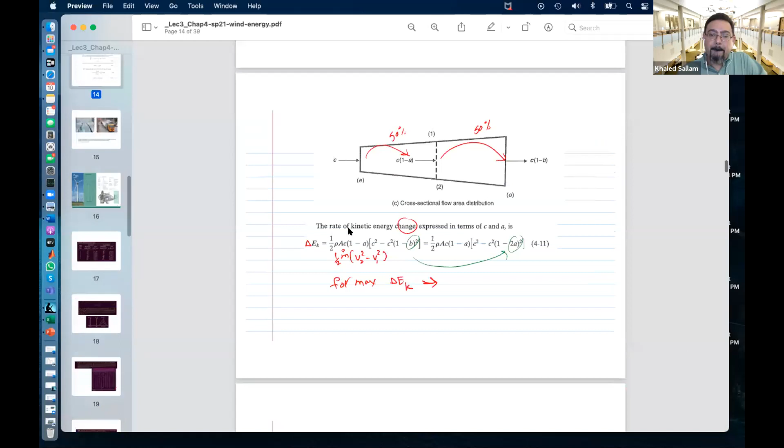We are really lucky in the States because of all the natural gas that we have and all the solar energy we have, especially in that quarter, but also because of the wind energy. We have a huge area that's basically under really favorable wind conditions. This tornado alley is also really good for wind, especially if you go high enough, like 80 meters, and that's not a big deal because those wind turbines with a 50-meter diameter is nothing. So the fact that you're gonna be hanging the axis of the turbine at 80 meters, that's typical, that's not a big deal.

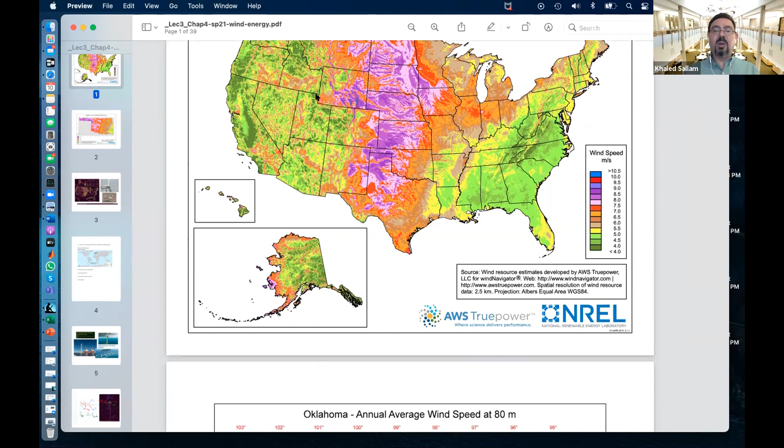So you can see all that area, and especially when you go to Oklahoma, our panhandle is a really very good place for it. And as I told you before, PSO, the Public Service Company of Oklahoma, the one that generates electricity for us, they really wanted to have a big wind farm over here and run the cable, but they didn't get the right permit to be able to do this.

But they're gonna make money by building this, and a lot of jobs too. Actually, one of the previous students that we had in the class is actually working on wind energy, but at his station in Florida now. So hopefully one of you may end up working in wind energy too.

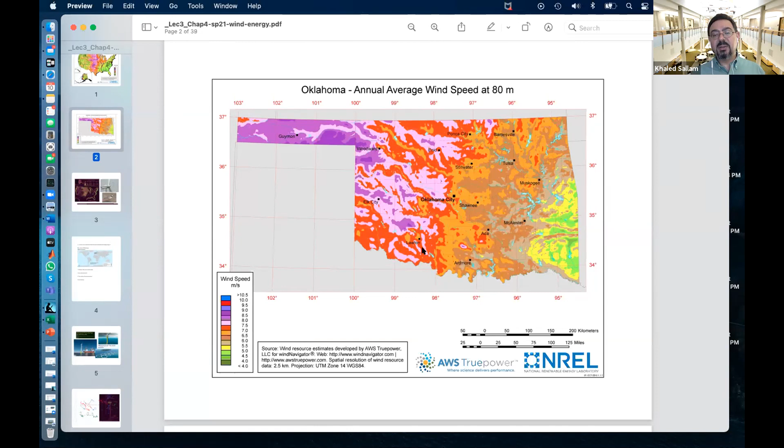But people don't like it to basically be near their beach house. And I remember, as I told you, Senator Ted Kennedy, who was supposed to be really like a green senator, like he would love renewable energy, when they wanted to put a wind farm in the back side of his own state, he refused, he declined.

So people, amazingly, and from an environmental point of view, sometimes complain about wind turbines. There is a legitimate complaint about noise, for example, if it's nearby and whoosh, whoosh, you don't want to hear this. There's also some concern about maybe electromagnetic interference. There's also real concern that this kills birds, and especially bats, and especially some endangered bat species. But there's research about how we can scare bats from getting close to them, or color it so that birds can see this thing rather than it blending with the sky. So there are ways to basically scare birds from getting closer to it.

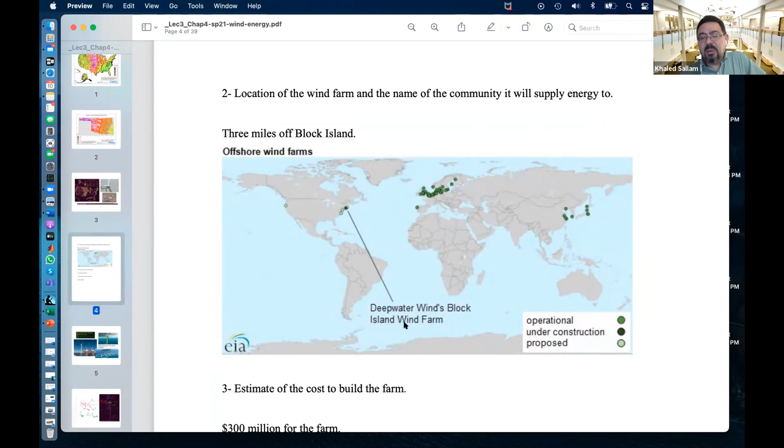Other places in the world actually have a lot of wind. These are places with offshore wind turbines, not onshore, but offshore, sitting in the water. You can see how much Europe has, while here we have only one. If you Google this, it's the Block Island farm. It just started running maybe the last 2 years or so. It's not really that old.

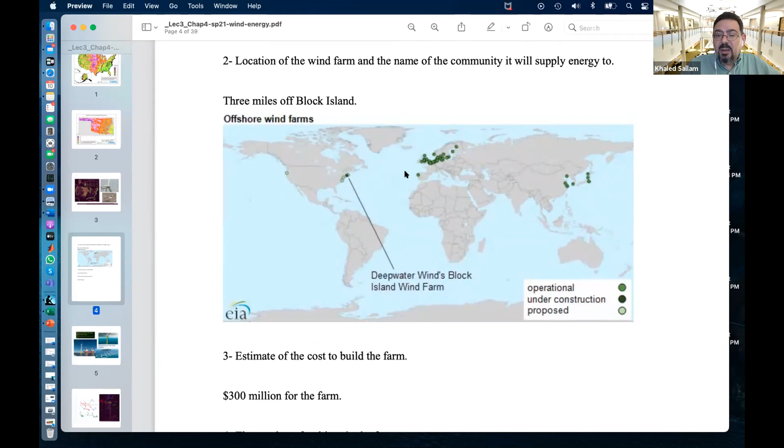While Europe has so many, you could argue that because our natural gas is so cheap, why would we invest in a big wind farm? And maybe that is true. So I guess natural gas is our blessing and our curse at the same time. But you can see how much wind farm is actually sitting in Europe over there.

So they have 5 wind farms, sorry, 5 turbines in that one. Compared to, you can see how much is in each one of those wind farms.

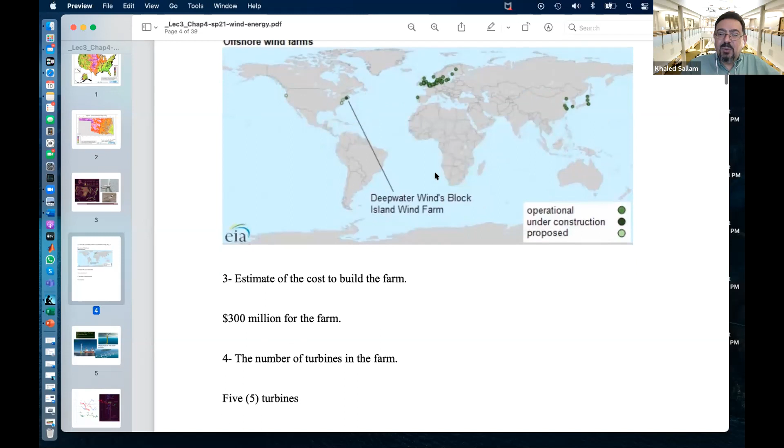Recently people even started to build floating wind farms. So what's the difference between floating and fixed? The fixed ones are sitting in the ground, so they cannot go that far deep. But if you make them floating, then you can send them very far back into the ocean, away from your beach.

So you win 2 things by doing this. One, you get away from the people that say, I don't like a wind farm on my beach, I just want to see the ocean and the waves. Well, if it's far enough, they don't have to see it or listen to it. Second, the farther you go, the more velocity you'll get because you get away from the interference of the buildings and cities on the shore.

So Japan actually built a couple a few years ago, in the place where they had the nuclear accident. In front of their Fukushima nuclear reactor that exploded, they had 4 reactors there. They built farther out a floating wind turbine. It's still experimental, but the point is you can put it there and it can generate electricity, and of course you have a cable that takes it from there to here.

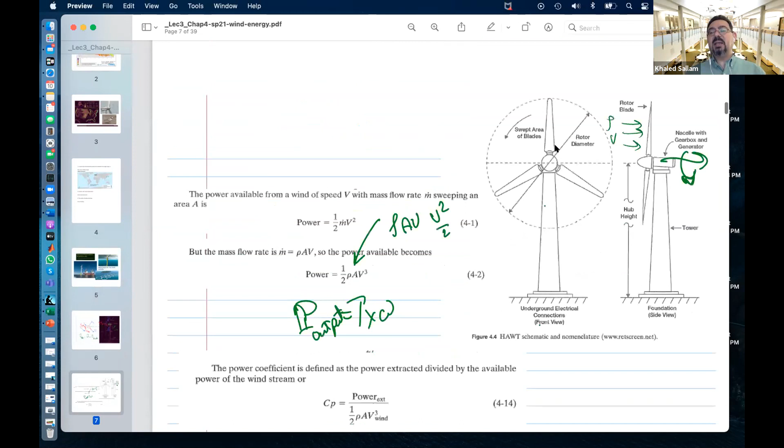But from the energy point of view, people just like to look at this and do a kind of Bernoulli equation analysis—the same thing for the wind turbine as for the hydraulic turbine. You can go into the fluid mechanics and figure out the angles, beta and alpha, but at the end of the day you can also look at the whole thing as one big black box: I give you this much potential energy, how much torque or power am I getting, and that ratio is the efficiency. We saw those graphs that plot efficiency as a function of specific speed, remember? The efficiency was as high as 99, 97 for a Pelton wheel, and in the upper 80s for Francis and Kaplan.

So the same thing applies here for the wind turbine—we can also analyze this from the energy point of view. What do I deliver to this turbine? I give it kinetic energy in that big cylinder. This air is coming, I have an area pi r squared, and rho times the area times the velocity—that is my flow rate, M dot. Rho A V is my M dot.

And the kinetic energy per unit mass is V squared over 2, so this is the power. The power delivered to that disk is half rho A V cubed, because V squared comes from here and V from here—so the power is a function of V cubed. That's why they show you those maps all the time: when you go from 9 to 10 meters per second, it's a big deal, because the power scales with velocity cubed—9 cubed versus 10 cubed. Going 1 meter per second extra is a big deal.

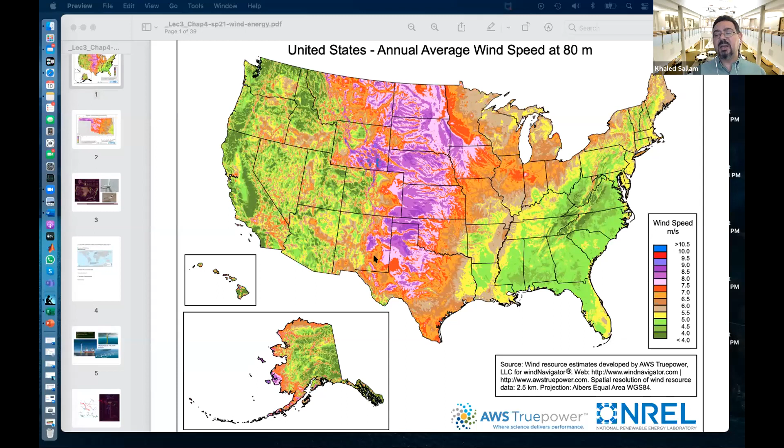So now, how much of this input power is going to be electricity on the other side of the cable? The ratio between those things is our efficiency. But in wind turbines, they don't call it efficiency—it is efficiency, but they call it CP instead. What's CP? Power coefficient, which is power output over power input, which is efficiency, but we're not going to call it that—I think we have to respect their vocabulary.

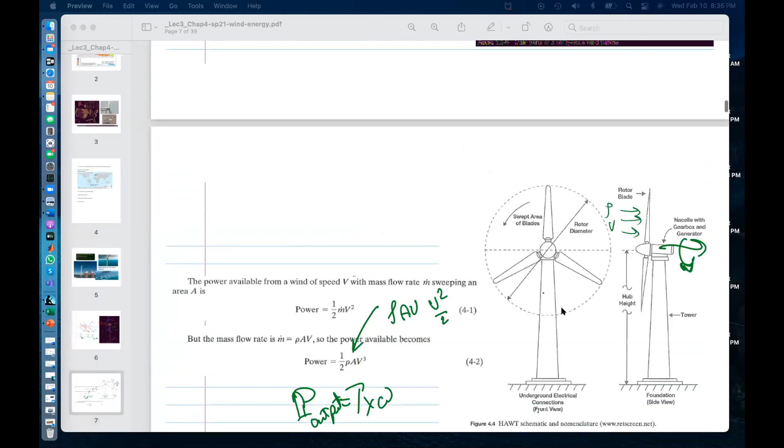So the power coefficient. Sorry to interrupt—no, interrupt anytime you want. Would you mind showing me that velocity on this figure that is right now in this slide? This one? No, no, no. This one? Yeah, right here—that velocity, the wind, and all those in this figure, this explanation on that figure.

What do you want me to show you? I'm still confused on this V wind and U blade and all those. So there are two velocities here for the air.

There is the absolute velocity and there is the relative velocity, right? The absolute velocity is the velocity that someone on the floor, someone not moving, will see. That is this one. Makes sense?

It's all axial and it's coming toward us. So we are talking about the blade of the wind, right? I mean, like that windmill. There's no such thing as the blade of the wind, there's a blade of a turbine.

This is a blade of the turbine, and I am doing a cross section of it. This guy really goes from the hub all the way to the tip, as you can see over here. See, it goes all the way from the hub to the tip. So if you just cut in that place, it looks like this, except we are cutting this guy, the horizontal one, in front of our eye.

Right? And so the wind is coming toward him, coming parallel to the floor, right? This is the ground. And so the wind has to come horizontal, totally horizontal, toward us.

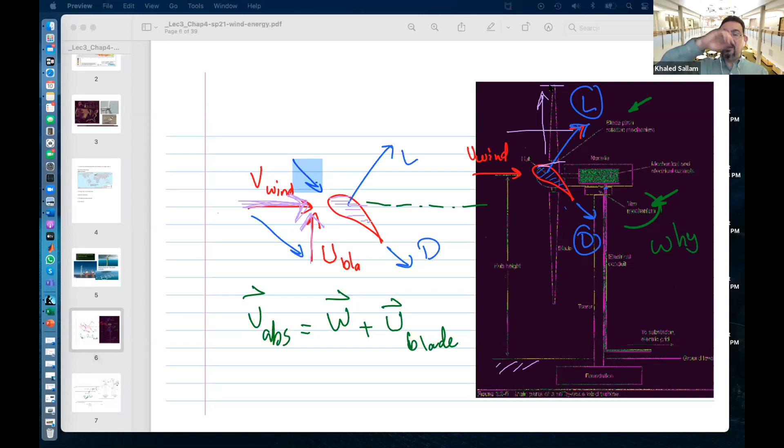When he's at the top point, where is its velocity? Anyone? What is the plate velocity at this place? There is no velocity, I guess. No, there is velocity. Help me, anyone. What is the velocity of the plate when he's here, at the highest point?

At the tip of the blade? I want the velocity of the tip of the plate, which way it's going. That's what I'm asking about, the tip of the plate. What's the velocity right now, which direction is it moving, when he's at the tip? When the tip is at the top, not dead center, the top place. When he's at the top position, counterclockwise, that is the velocity of the plate.

Counterclockwise, away from us, right? Yes, I wouldn't exactly call it that, but counterclockwise, correct, and away from us, normal to the page, right? Yes, you will be shooting exactly normal to us.

And when he comes down on this side, on the other side, he will be shooting down. So on the other side, if we want to plot it, he would be like this. That would be his U. And he will look like... he will not look like that, he will look like this. Make sense?

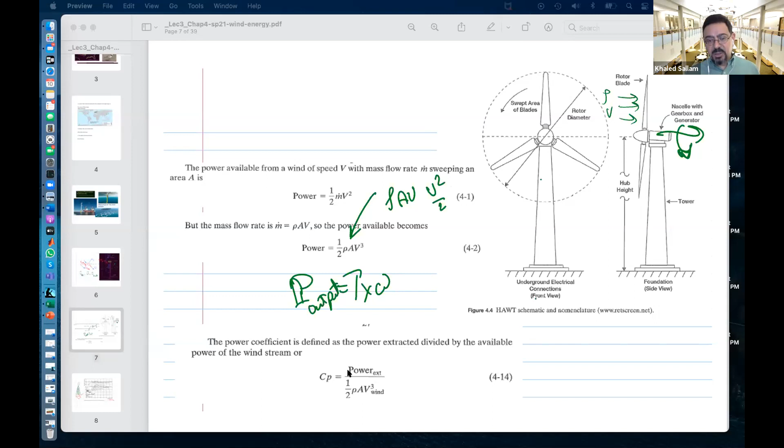So we said it's nice to see the plate angle and all those things for optimizing the direction and everything, but also it's important to look at the whole thing from an energy point of view. So from energy point of view, one should basically look at the output and the input, and the ratio between them is the CP, right? Power coefficient, which is efficiency.

So how does the CP look like? Here, this is the CP on the y-axis, and for different shapes, the CP is a function of the tip speed ratio. What's the tip speed ratio? Omega r divided by u wind. What's omega r? This is omega times r, so it's like the tip velocity. And u infinity, that's the wind pushing on it.

So first thing you notice, two really amazing things on this curve. What is amazing that you notice? Two things that will make you go 'what, I cannot believe that.' What don't you believe on this curve? The one blade rotor - that got me by surprise.

Well yeah, but it's not really practical, right? You can see that the maximum thing you get is like with 3 blades, and that's why they are most common. 2 blades are not really that great because there is kind of an imbalance when the plate is behind the tower - what happens is it's in a really bad spot, not getting power. Only when it's cleared the tower can it generate power, but here it's dead.

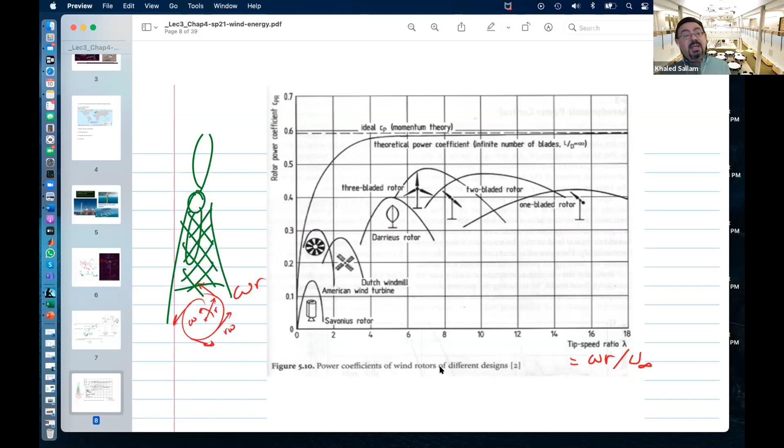What's the explanation? It is running faster, right? The explanation is that those blades are not running by drag. If they were like a Viking ship where the sail is pushed by the wind, that sail cannot move faster than the wind, no matter what. But when you generate force based on lift, not drag, you can make the speed of the blade faster than the wind blowing on it.

Like a sailboat - if you look at sailboats, they can easily run faster, twice the speed of the wind blowing on them. It's really interesting to plot the wind and the sail of a boat - I used to do this for experimental fluids, not something I'll give you in the exam. The boat would look something like this, and the sail would be something like this, with the wind coming this way and the boat moving in that direction - v relative would be the lift, which pushes us forward.

And yes, there is a drag direction that will try to send us sideways, but it will be countered by the keel. That's another problem to fix. But the point is, now let's make the boat go faster than the wind.

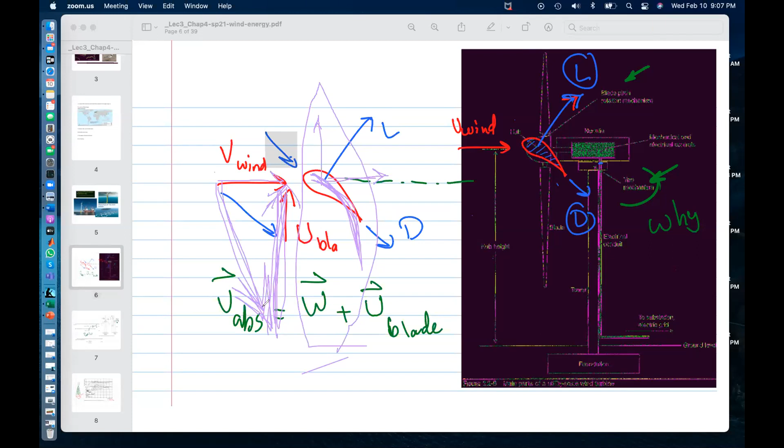So no matter how fast, that's the key point here. No matter if the boat is moving 10 times faster than the wind, there is always V relative, right? And all you have to do is adjust the sail for that new direction, and it will still generate a force. Yes, the force now is more and more pushing you to the side, but still there is a contribution that pushes you forward. So because we depend on the lift, we get a component that takes us forward.

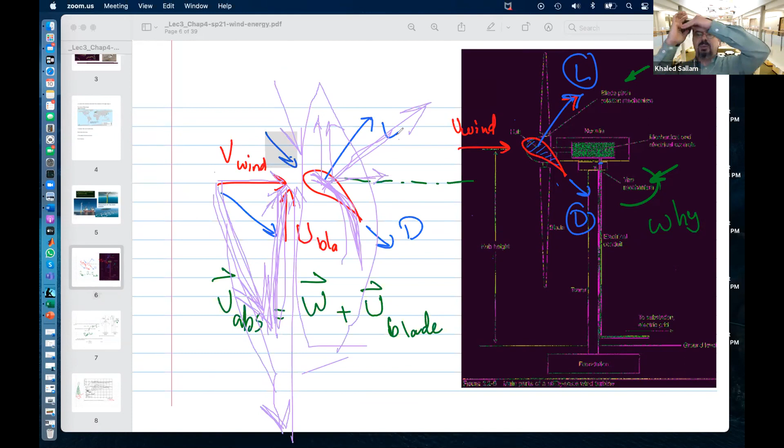Okay, have we depended only on drag, like a sailboat in the Viking time, where they just have that square sail and the wind is blowing from behind? It cannot move any faster than the wind speed. So what I'm saying is that no matter how quickly this plate is moving, there is no escaping the wind. There is always going to be V relative.

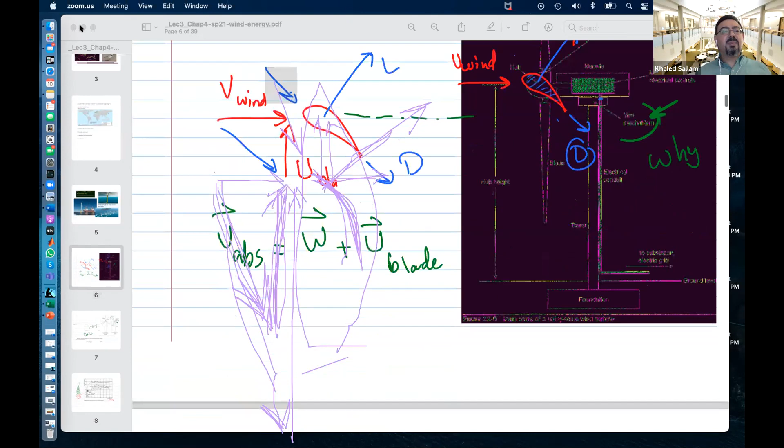And so that's why... let me stop sharing and share again, that will clean things up. So no matter how quickly your plate is moving, 7 times, 10 times, you will still get a contribution. But the guys that run with drag, like this Savonius type, that is mainly drag type, cannot hit more than wind speed of 1, after which... and that's the tip, the rest of the plate is moving with smaller speed. That's why it still generates some power. But at one point, when all the plate is running as fast as the wind, you get 0 power.

Does this make sense? So you depend on the drag, and those guys are like cups, the Viking ship sails. You cannot move faster than the wind. But if you depend on the lift, like the Dutch turbines, the traditional ones or the American wind farm turbines, you'll be able to hit 2, 2.5 times wind speed and stuff. It will still work.

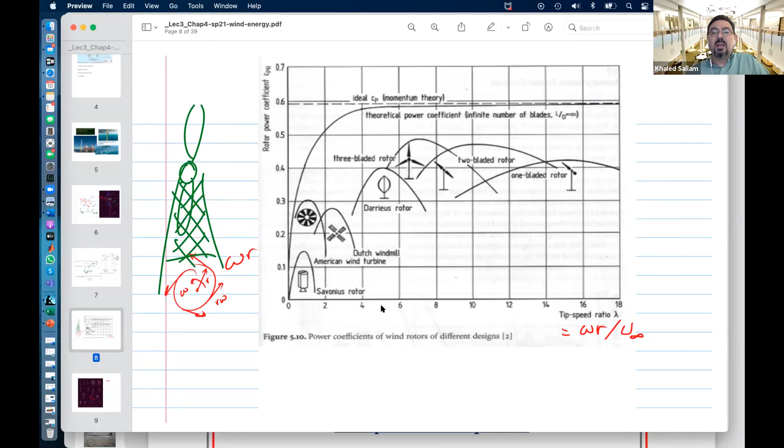Very good. So then from this curve, what I need from you is to be able to extract this point, the CP based on the speed. So if the problem says the wind turbine is running with a tip speed ratio of 7 and it has this much dimension, find out what's the maximum power it can extract. You would say, well, it has this area and the wind speed at that place is 7 meters per second, for example, or whatever the wind speed is, and rho air is 1.2. Here is the input power.

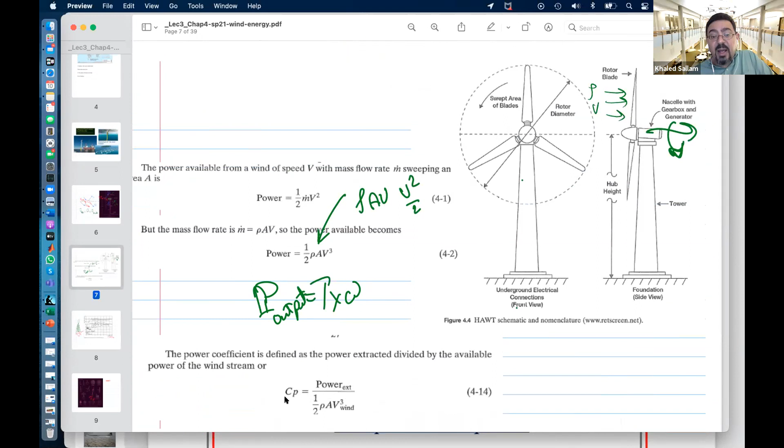Now to come up with the output power, I need my CP. So I go to this curve. What turbine did he say? Did he say American wind farm or Dutch or the 3-blade turbine? Whatever he said, I'll go there, find out the tip speed ratio, right? And I calculate my CP. Does this make sense?

So now what controls U infinity? That is Mother Nature. Mother Nature will tell you U infinity in that place is this much. But what controls omega? What controls omega?

That's the lift, right? Say that again. Say the lift, or the lift force. Well, you can manipulate it by playing with the plate angle. That is correct, and you can see there's a way to make this turbine rotate less, or make it not rotate as fast, by messing up its angle. Like you can control this pitch angle so that it's not optimized and therefore it will not run as fast. And you do this when the wind speed goes really high. When U infinity is very high and you don't want it to speed up, you basically mess it up so that it's not generating as much lift. But that's control over it.

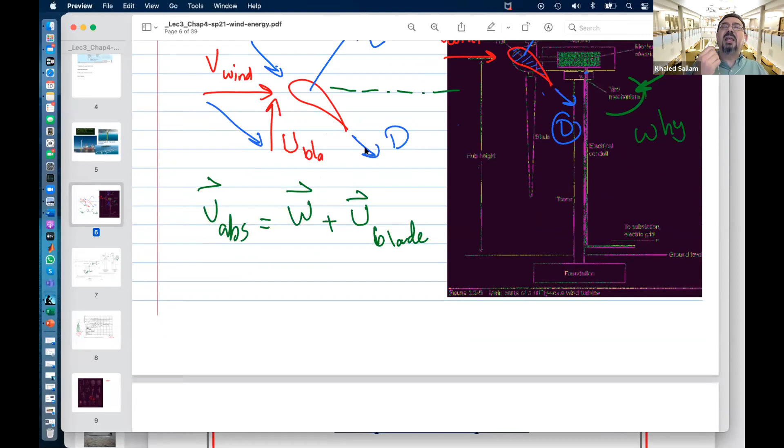But what is the main driving force that controls omega? What do you think? Like why would the plate run at 100 RPM or only 10 RPM for the same wind speed? Radius?

No, I don't think it's the radius. The surface area? No. The angle at which it hits? No, I think that's what Denver just said. No, it's not the angle.

It is the load, the generator, the pump, whatever is holding the shaft on the other side. The wind is twisting the plate, and someone else on the other side is holding the shaft, like, don't move unless you move me first. That shaft is connected to a generator, or to a stone crunching grain in the old Dutch mill, or to a pump taking water from a well. So the load and the gearbox connecting the two will make the shaft easy or hard to turn, right? And it is the job of the designer to make sure that the load, with the power available from the turbine, puts you in that place.

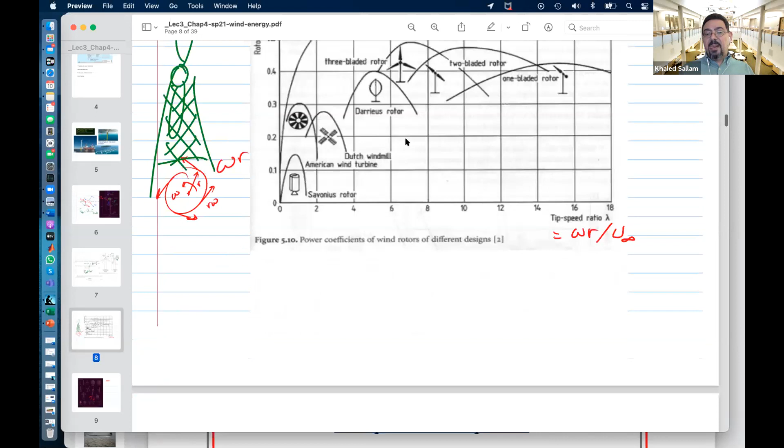So there's a general classification: horizontal axis wind turbines, where the axis of rotation is horizontal. Those are the traditional ones, and the modern ones that everyone uses are kind of different. People try to do a lot of modification in order to make the area bigger, whether at the inlet or at the exit, that helps.

And look at this one. Why do you think they have 2 plates, 2 rotors, counter-rotating? The one behind would catch the wind from the one in front, especially since the front one is already sending the flow with a twist. So the other one can rotate the other way. So when the wind comes in, the first one spins this way, and the flow behind it goes the other way. That twist in the other direction is perfect for the other rotor to spin the other way and use it.

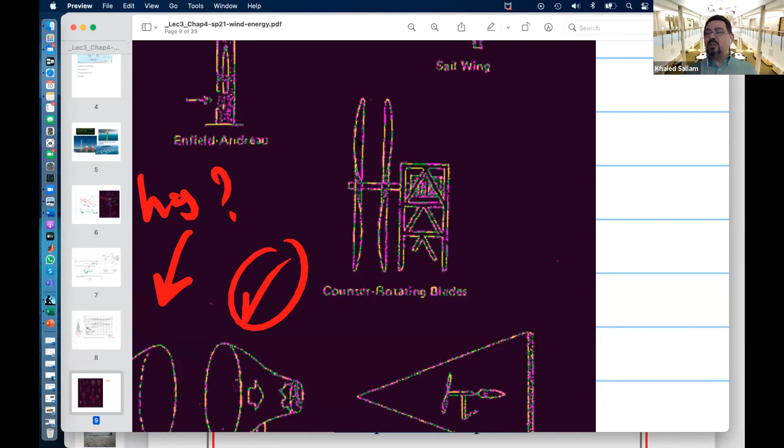And then there are vertical axis wind turbines, which are not as common, although there's actually something nice about them. What's nice about the vertical axis wind turbine?

Vertical axis, because the shaft is vertical, right? So what's nice about them? Can anyone say something nice about them, when the shaft is vertical? It doesn't matter which way the wind is blowing. Exactly, they don't need a tail to direct them. You just set them in the wind and they will run.

They don't need redirection. But here's one more nice thing: their generator, which is usually very heavy, can sit on the floor. So you don't need to hang the generator on top of the tower, and the tower doesn't need to be as big and heavy, since the generator can sit on the floor. That's why people think those are more suitable for urban settings, like on top of buildings.

I found something else just like two weeks ago, from February 5th, Department of Energy. Look at this, it's exactly like this one. So it's a helical turbine, but vertical axis. And rather than standing up in the wind, it's sitting in the water. So this will go down.

What's nice is the guy who invented it had a patent on that design. Amazingly, whether the wind or the water is coming this way or that way, it always rotates in the same direction. So isn't that nice?

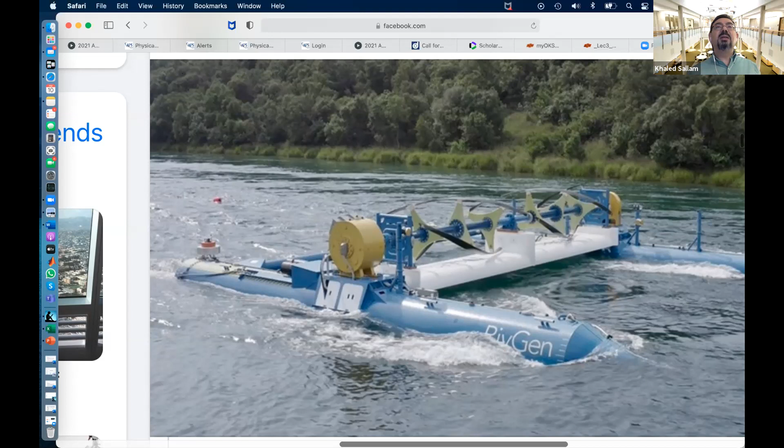One year, the velocity diagram of that was actually the homework. Why don't you plot the velocity diagram when that plate is here and here and here as it rotates in the wind? No matter which way the wind is coming, from the right, left, top, or bottom, you always rotate in the direction of the leading edge. So the airfoils will each rotate forward.

So what I'm saying is, if we imagine a circle like this, and the airfoil is here, and here, like this, and here, like this, and here, like this.

And the wind is blowing this way, it will always rotate this way. Whether the wind is coming this way, or from the top or right, it will always rotate in that direction. How do we do the velocity diagram for something like this? This sounds like a good homework.

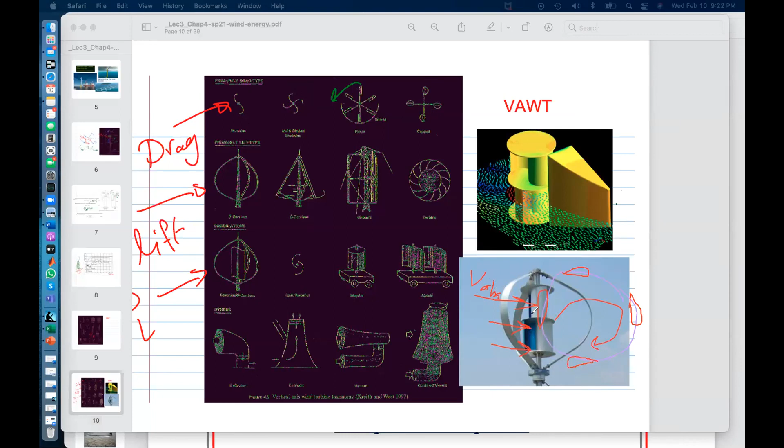So let's look at this guy. Where is the U going? Up or down? Up. So here is U, and if this is V and this is U, which way would W be? Should W go down like this or up? Down. So this way, W plus U equals V.

And if W is this way, which is the direction of the drag? Drag should be in that direction. That's easy, that's the drag. But now the lift, is it up or down? Up. Excellent, this is actually not easy, people get confused. So it will be up.

Again, look at the lift. It's helping because it has a component, L theta, that is in the direction of rotation. It has a radial component that doesn't help, but it has a component that's pushing. And the drag is the opposite, it has a component that will eat from our L theta. So you're hoping that airfoil is such that the lift is really way bigger than the drag.

And now when the wind is coming this way, on the back side, because the wind keeps going everywhere, let me draw the wind, my wind is red. The wind is blowing this way. So which way is the plate, up or down? Down, like this. That's the plate. And so which way is W, going up or down? It's going up. Excellent. So this way, W plus U equals V.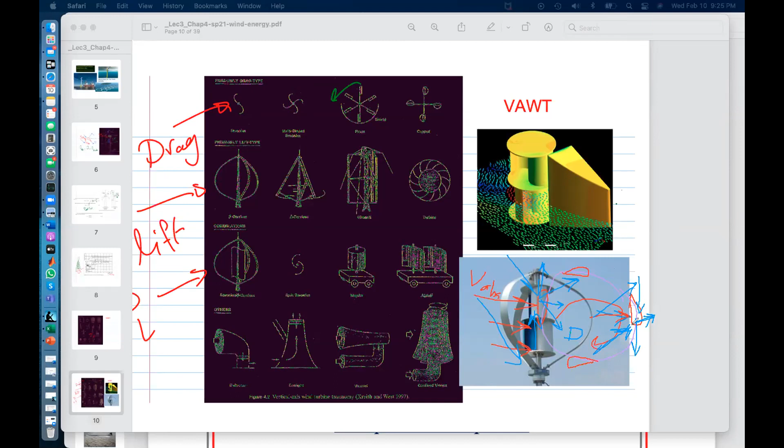So the drag is in the wind direction, the V relative. Again, we don't care about V absolute. This is the drag, and the lift, should it go up or down? Go down, right, should go like this.

So now how do we tell? Basically for the airfoil, in order to find out the aerodynamic force, it's much easier to guess where the total aerodynamic force is. Is the aerodynamic force going to be like this or like this?

Actually, if this was the lift, then the aerodynamic force would be like this. The total is the lift plus the drag. So you need to ask yourself: if I am pushing this way, will he get pushed this way or will he get pushed that way?

He will help, right? But here it will be all drag, and that's not very useful. Here, when the wind is going this way, this will be all drag. There is no lift, and that doesn't really help. So there was this region where he's not really helping.

But in general, he was always getting a force that will turn him this way. And amazingly, whether the wind is coming this way, from the right, from the top, or the bottom, you will always see that he will always turn clockwise. And that's the deal with this guy too.

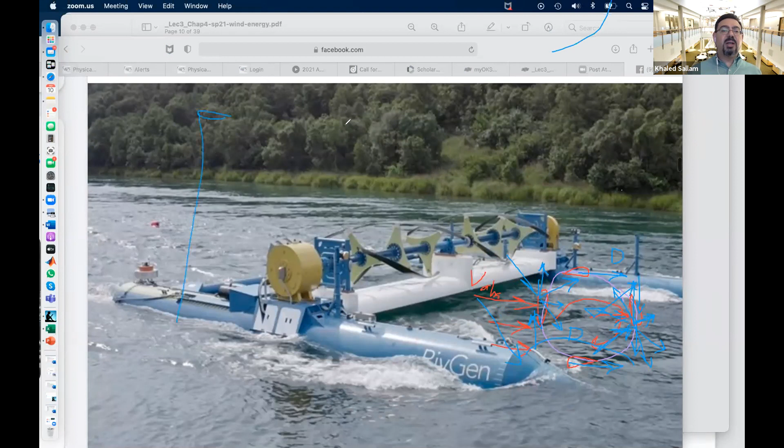So each one of those airfoils - why are they helical? Why are they set in a helical direction instead of straight? The straight version is called an H-rotor, where all the airfoils are basically sitting straight, attached vertically on the circle. But when they make it with a twist like that, why do you think that is the case? It has to do with that velocity triangle that we just drew.

Because there are places in the cycle where the airfoil is not helping - he's actually being slowed down because he's flying against the wind. So when he's flying against the wind, he is a liability, he's hurting us. So when you have them straight like this, you have a whole plate that is really hurting the cycle, and the turbine will be like tuck, tuck, tuck - every time one of the plates comes to that place, it will be a problem. But when you make it helical like this, what's the advantage?

Anyone? Well, in that particular spot, I guess it would be thinner or twisted a certain way so it's not creating so much resistance. When it's helical, there is always one spot in the good place and maybe one in the bad place, but it's continuous operation - you're always having the other plate in a good place and the other one maybe not as good, but there is no tuck, tuck, tuck, tuck.

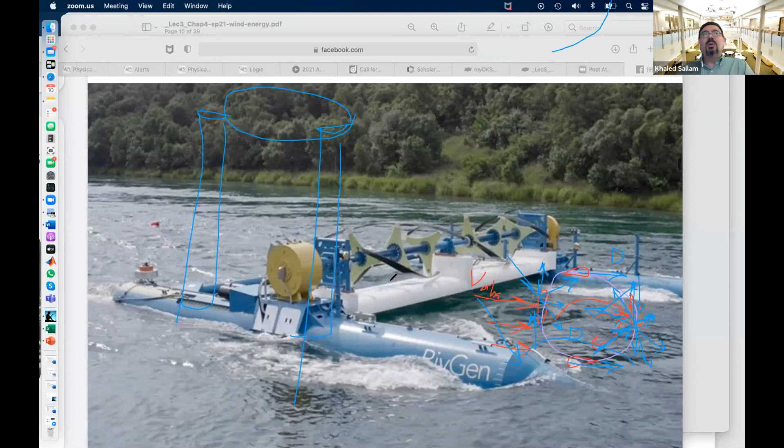It's always smooth. It's like if your family has 3 kids, and one of them sometimes gets in trouble - every time he gets in trouble, the whole family goes down. But if, instead, he's always in bad shape while the other two are always in good shape, then the family goes smooth, there is smooth operation kind of. So with a helix like this, there is always one section in the bad position, but the rest of the airfoil is really in good shape, and so they wouldn't suffer as much.

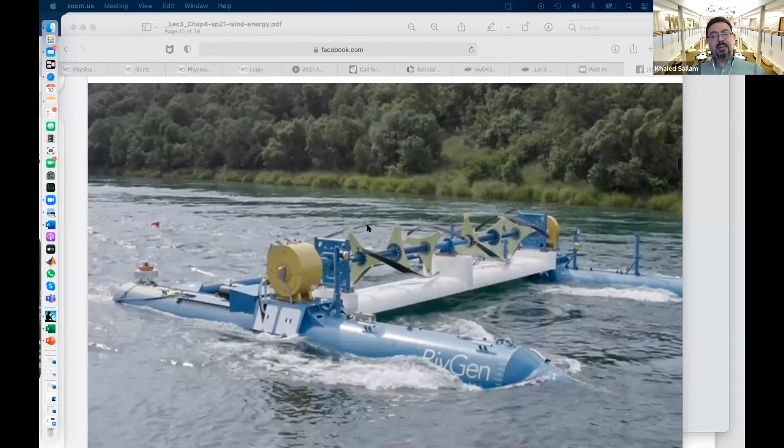So anyway, they are installing this for a place, 35 kilowatts. You can see it's not really a big deal, but for a tiny Alaskan village, rather than driving natural gas to them or giving them gas for their diesel or gas generator, something like this, no matter how expensive it is, actually makes absolute sense to run. Does this make sense?

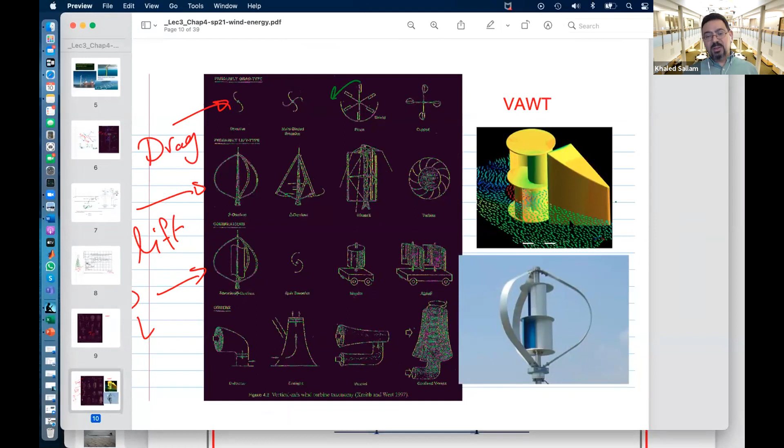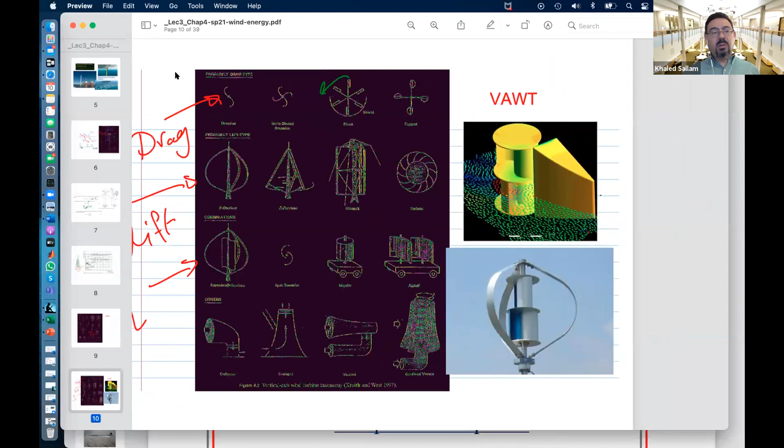This guy, by the way, Ted, is working for solar voltaic now. He actually took the course a few years ago, and now he works for Francis Solar, which is part of Tesla in Tulsa. Their job right now is to build as many charging stations for electric cars as possible on the highways. It's funny, when he got the job he told me his only exposure to solar energy was in that course. So maybe one of you will get a job in renewable energy, and this course would be the only thing that you would benefit from. Hopefully the course would be useful for at least one of you.

All right, so now, all those turbines, horizontal or vertical - what is the theoretical limit? Why did Betz say it's 59%? He derives it over these next two pages, just from an energy conservation point of view. So this is the Bernoulli equation between the inlet over here, and going to this.

P1 is just before he goes through the plate, and P2 is just after he goes past the plate. That's why in the sketch in the book, P1 should be here and P2 should be here. So he's basically building pressure just before the turbine, and as he goes through the turbine, his pressure drops, just like what you'd expect going through a compressor. Before the compressor your pressure is low and you jump up; the turbine is the opposite.

But while the pressure drops during going through the turbine, the velocity on the other side is kind of continuous, because of the flow rate. And so he's saying that once you leave the turbine far enough, the pressure will recover again and you get the regular pressure back.

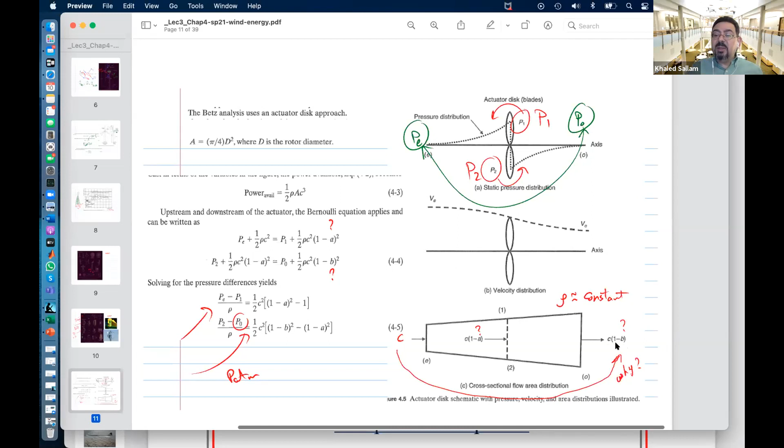And then he realizes that at the end he's going to slow down the velocity. Otherwise how would he generate power? The way to generate power is to slow the kinetic energy, eating into it to make mechanical power. So he's going to slow it to C multiplied by 1 minus B. What is that B? Is it 50%, is it 30%? B is a fraction. We'll see what is the maximum, or what's the optimum B.

And you may think that, of course, I should make B go to 1, meaning the exit velocity should be 0. That is the maximum power, right? From an energy point of view, if you want something to be 100% efficient in harvesting, you should eat all of it, right?

Like a consumer who comes into your shop and you want to harvest all his money, so he leaves with 0 money — then your efficiency of earning is 100%. So the wind comes to us and should leave with 0 velocity. But the problem is, if the consumer leaves with 0 money, he won't be able to get an Uber to go away. So he will stand at our door, not leaving. That's not how this works.

So it's almost the same idea. If you kill all the wind speed at the exit, the wind is not going to leave. You still need velocity to let it leave. And that point is what, as you'll see in the derivation, the fact that we need velocity to still leave is what will turn our

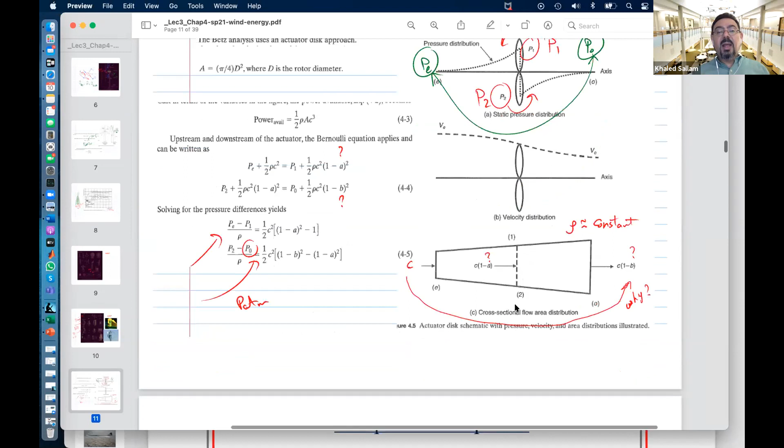He applied the Bernoulli equation between here and here because there is no external force, and he's applying the Bernoulli and momentum equation between here and here, again because there is no external force between the two. Then, just a bunch of mass, and at the end the force on the turbine is P1 minus P2 times the area. From that he's saying that force is the force the turbine experiences.

Where is it coming from? It's coming from the wind, right? I mean, who else is pushing the turbine plate? The wind. So when you apply the momentum equation between the force and the momentum at the inlet, m dot C, and the outlet, m dot C times 1 minus B, which we don't really know B. We don't actually know two things, by the way.

We don't know B. We are trying to find out what's the optimum B. And again, it's not 1 — we don't want to slow it down to 0. Otherwise the wind will not leave. But we don't know what's the optimum. And we also don't know A.

What is A? The wind starts with C, slows down to C times 1 minus A, and then slows down to C times 1 minus B. So first, he's trying to figure out what's the relation between B and A. Then he'll try to optimize B or optimize A — one of them should be the variable. Once you find that optimum value, you'll be able to find the corresponding optimum power extraction.

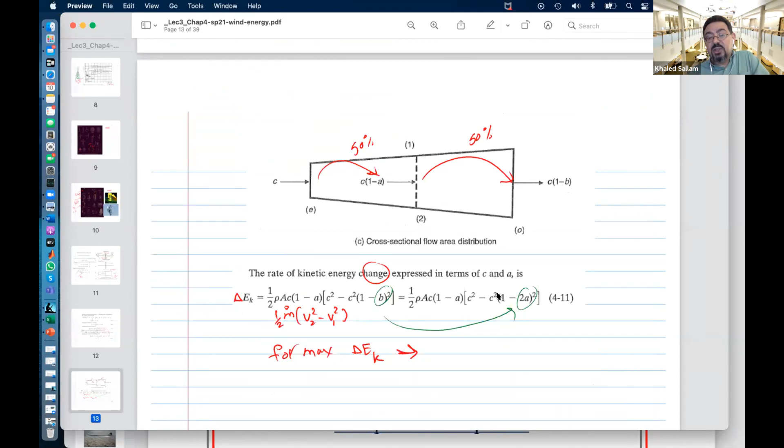So he's finding out what is the energy lost between C and C times 1 minus B. He found that the energy lost is the energy he's going to extract. Then he differentiates that extracted energy expression with respect to the variable that controls it, which is A. So dE/dA equals 0, and from that he figures A is 1/3. So the wind slows by 1/3 optimally before the turbine, and 2/3 before it leaves — and this is the maximum power you can extract.

What's the relation between power and energy? What's the unit of energy? Joule. And power is joule per second. So power is the rate of extracting energy, right?

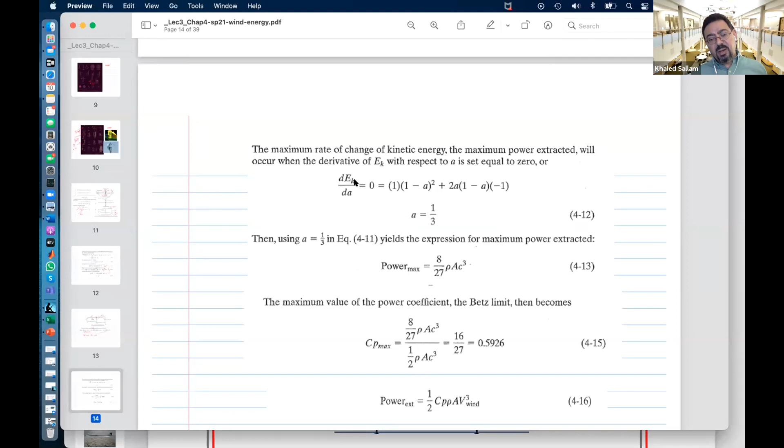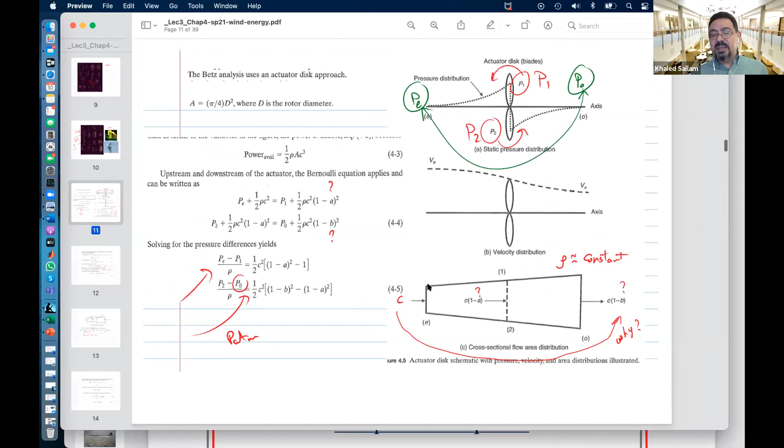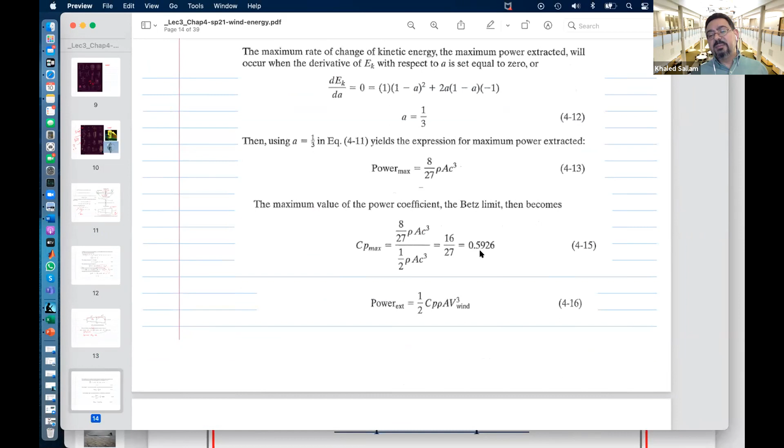That is the Cp max — the Cp max that Betz came up with. This 0.59 is basically just based on the fact that I cannot let the wind die at the exit, otherwise it will not leave.

So the power is m dot times delta of half V square — the change in half V square. But the m dot that's going through is also affected by the velocity through the plate, and that velocity turned out to be related to the velocity at the exit. So if you kill that exit velocity, you also kill the flow rate going through, and you get zero power.

Does this make sense? So what should really be amazing and puzzling for you right now is why this makes sense — we get it, but why did we manage to let the water leave with zero velocity at the exit for the water turbines? Why was that possible?

Maybe a hint: that helical turbine we just saw for water — if it were a wind turbine, it would also have 59% efficiency and could not go to zero, so it could not reach 100% like the Pelton wheel. So why is this one treated as if it's a wind turbine? What is the difference between those two scenarios?

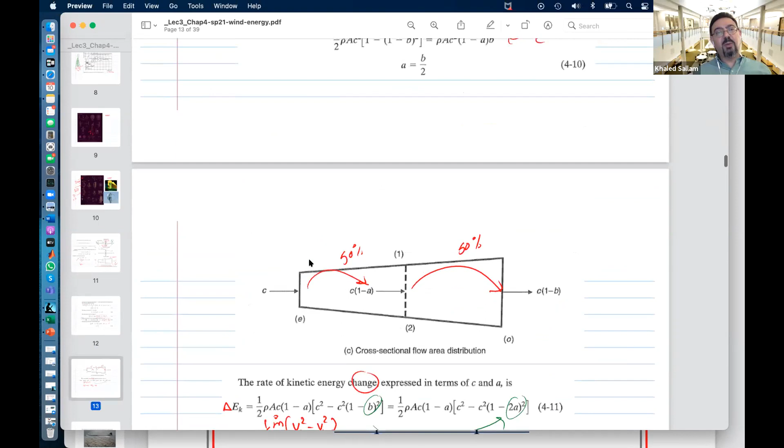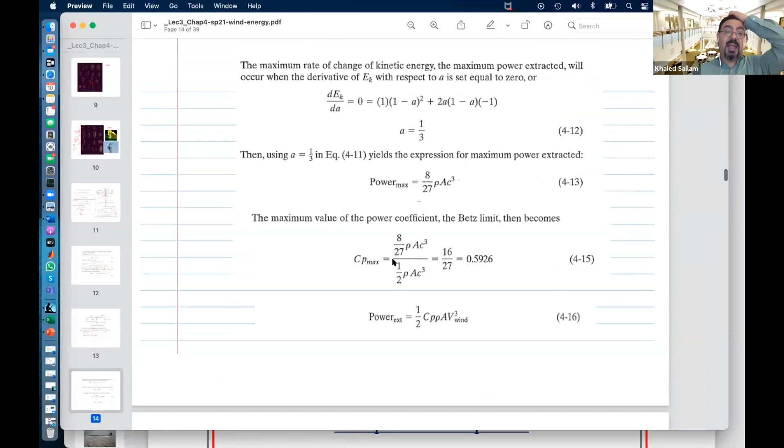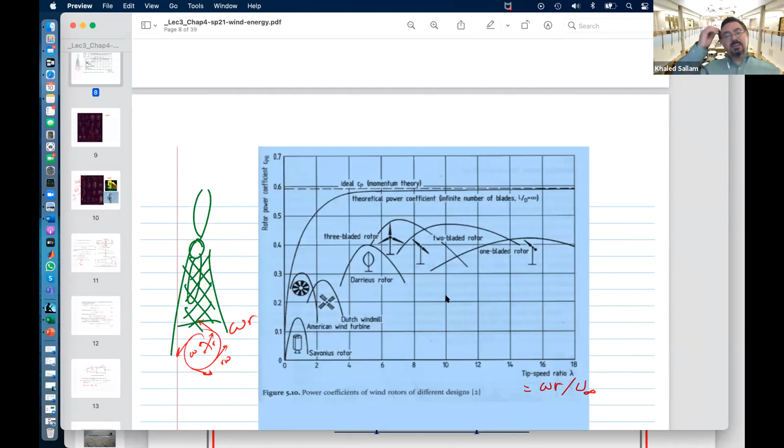So this is 0.59, right? But actually, the real limit is not this. The real limit is actually this, and this comes from the fact that the flow also has to twist. In all turbo machines, the velocity at the exit needs to twist because the machine is rotating, so the flow coming in straight needs to twist at the exit. So the exit velocity has an extra twist component that slows it down more. When it comes to m dot, m dot is only based on the axial component, so if you twist at the exit, that extra velocity needs to be added, which slows you down even more in the energy calculation. So that is the curve that all machines are trying to approximate or trying to hit.

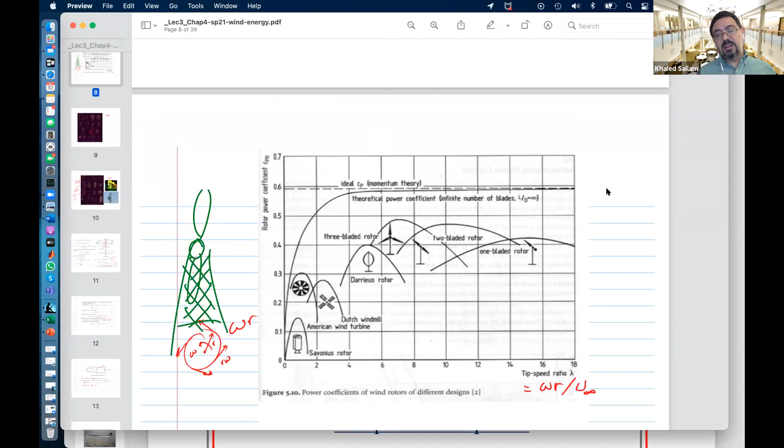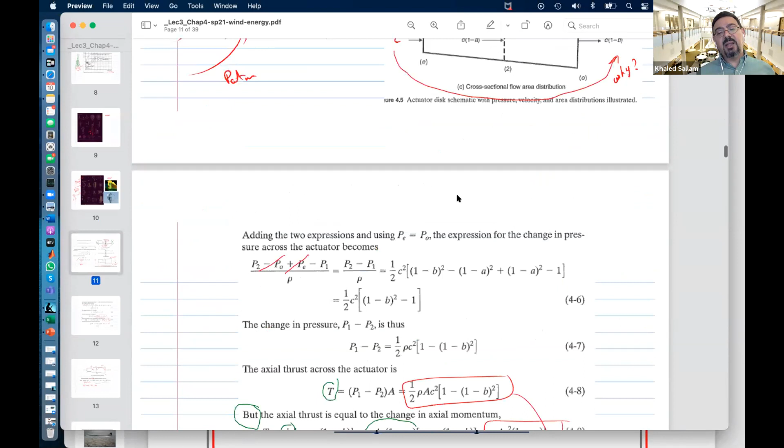But if you send the flow through, this kind of analysis will be applicable, and you are stuck at 59%. So since we're stuck at 59%, the only way to extract more power is to make it bigger. With efficiency at 59%, if my turbine is this size, I get this much power, but if I make it 10 times bigger, I get 10 times more power. And also with economies of scale, it makes sense to make the blades really big.

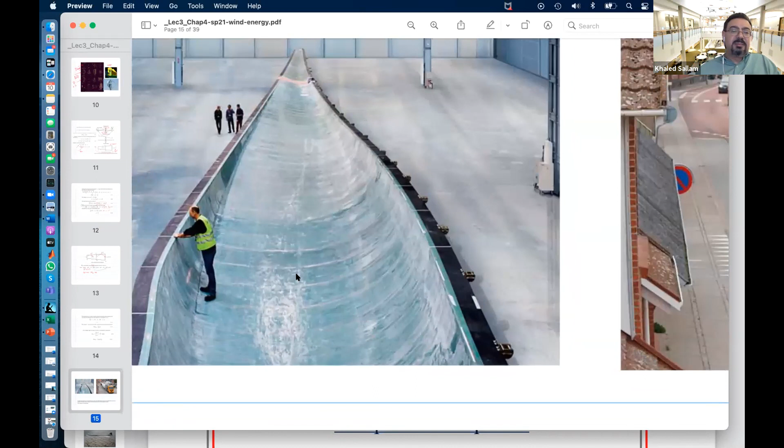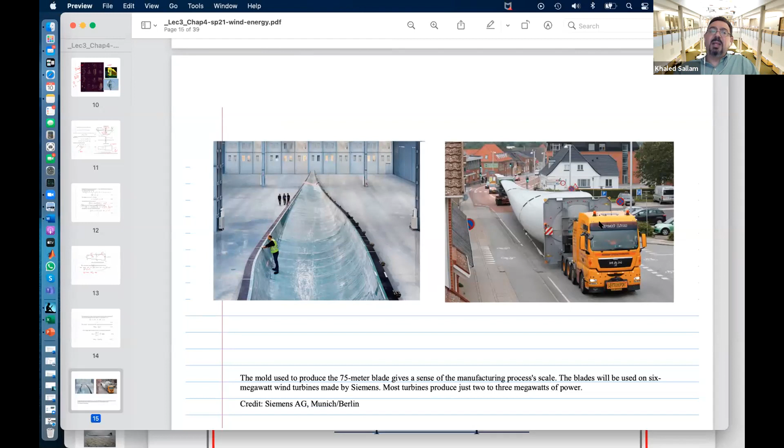So you can see how they build those blades, see the guy sitting in the mold. And of course, moving it over the highway is a big deal, especially in Europe where the streets are very small. Whenever I used to go to Oklahoma City, I would always see turbine blades moving on the highway. You always see turbine blades moving, I guess going from Dallas to Kansas and such, to install them there. So people build really huge wind turbines.

This one, how much is that? 7.5 megawatts, from one turbine. Okay, this is not the most common one. The most common one is like 2 megawatts, 1.5 megawatts even, but this one is a 7.5 megawatt turbine.

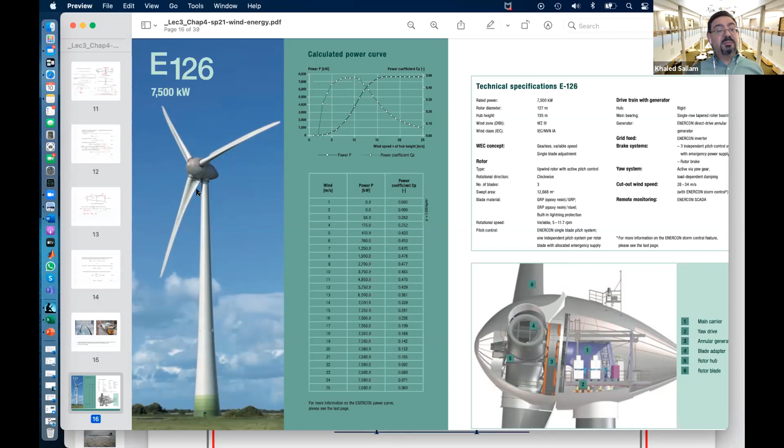And look at the blade, what I told you before, see how this is, what do we call this edge? Leading edge. And what do you guess this one is? The trailing edge, right? So this is the leading edge, and this is the trailing edge. And of course, this is the tip, and this one is the hub. This is the hub, and this is the tip, right?

And so one thing we notice is that the radius is so huge. And so omega r here, which can hit, hopefully, what's the magic number? What should be the tip speed at that point?

7.5 times the wind speed. So whatever wind this thing is designed for, if it's running in 10 meters per second wind, this guy needs to be running at 75 meters per second. But this would be a different u. Why? Because although it's the same omega, the radius is different. So because the velocity triangle has a different u at different points, the v relative differs with the same v absolute. Here's v absolute, here's my u. So u at the tip is much bigger than at the hub.

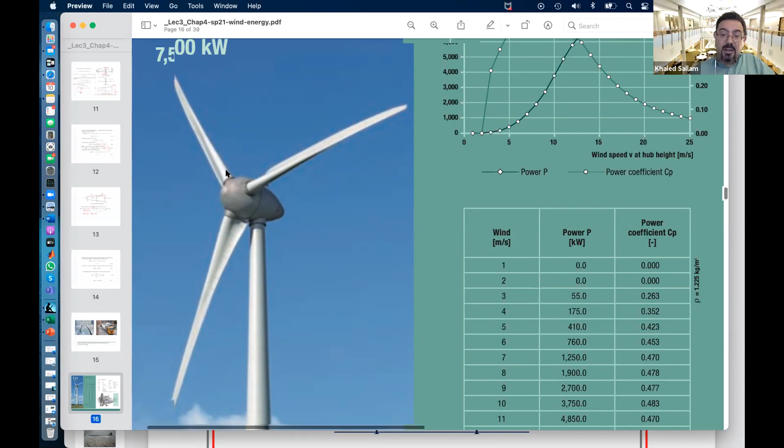Those big machines were not going to run for any small velocity. All the bearings and stuff in the generator require a minimum speed to run. So when we look at the power curve coming from this turbine, it looks something like this. That's the power curve. The first velocity that it will start in is called the cut-in speed.

So let's call this 2 meters per second. Anything less than 2 meters per second, this turbine is not going to run. Once the cut-in speed is achieved, it will start running, but of course it's not going to extract that much power. As the wind gets higher and higher, it will get the maximum power. What is the maximum power? 7.5 megawatts. So the speed where it achieves that maximum or rated power is the rated speed.

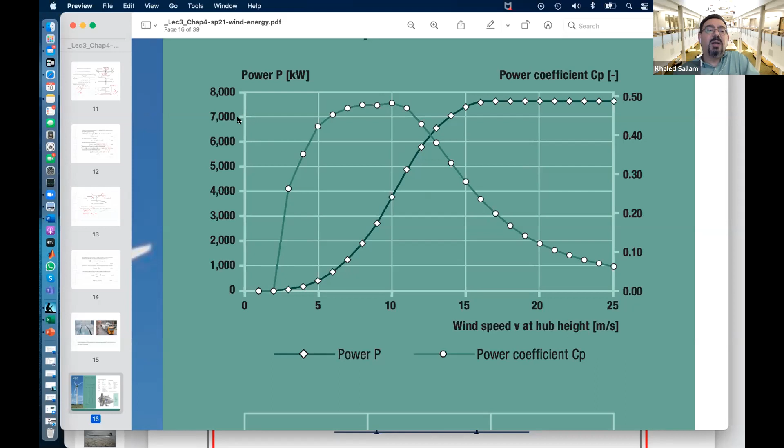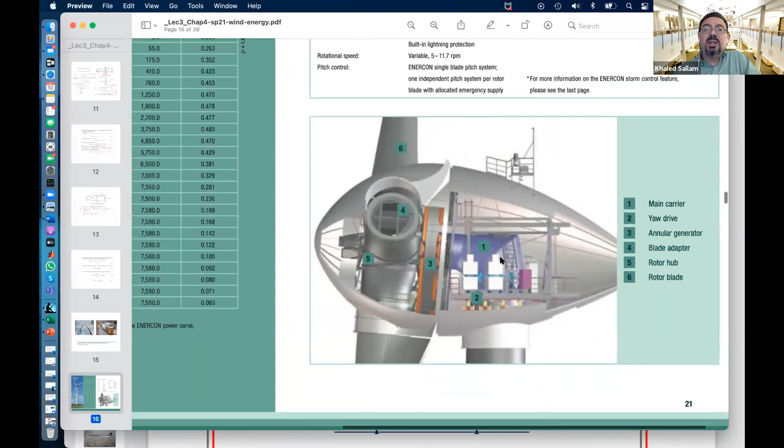Now once you hit the rated speed, say 16 meters per second, if the wind increases more, what will happen? You can get more power from it. But the generator, the bearings, everything in that machine is designed for 7.5 megawatts. That poor generator cannot handle more. Here's the generator - all the components and wiring cannot handle more than 7.5 megawatts. So what do we do with the wind?

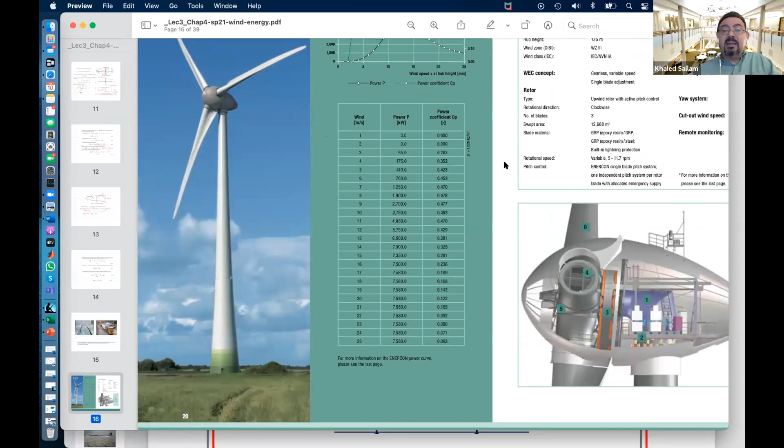With the wind hitting more than this speed, when we go to 20 and 25 meters per second, what should we do? Cut it off - well, not cut it off exactly. The end is this one, the cut-out speed. So the cut-out speed is at 25. When it hits this maximum, the turbine has to stop, and they make it stop so that it wouldn't get damaged.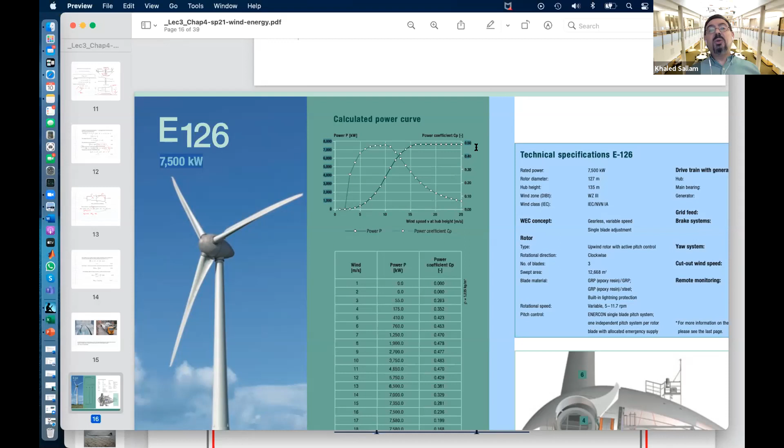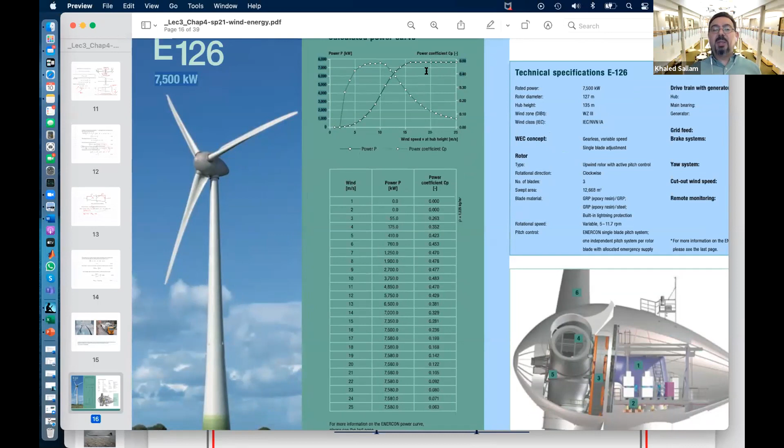But between the rated speed and the cut-out speed - between V rated and V cut out - what happens here? More and more wind is available, so you could make more and more power, but you don't want to. So what do you do with your blade? You mess up the pitch angle. Using pitch control, you can change the angle so the blade actually performs worse and worse. But because the wind power is more and more, you still maintain the same power output.

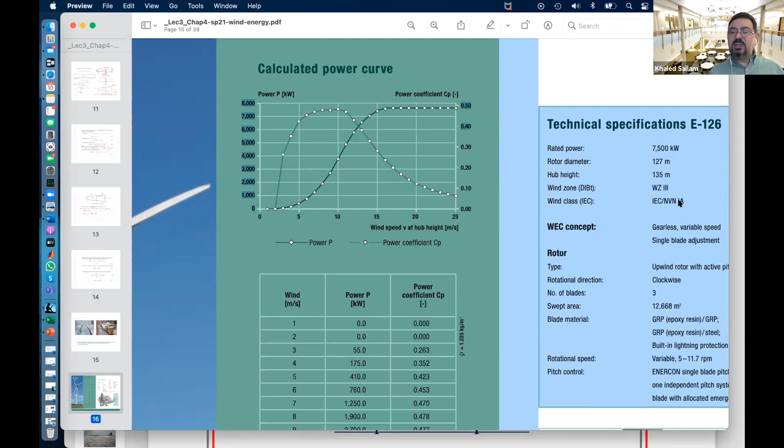Does this make sense? So when I divide the output power by the input power - what's the input power? Half rho A V cubed, that's the V. So if I want the input power at 10 meters per second, you'd say half rho, which is 1.2, times the area. Where is the area? Rotor diameter, 127 meters. You see that, guys? 127 meters in the spec sheet - that is the area of the rotor.

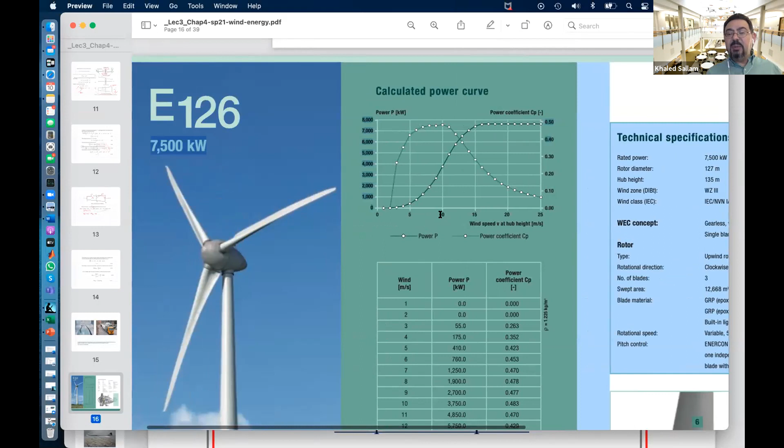So at this speed, the input power is half rho A V cubed, and the output power is how much? Over here, what's the output power? 3.8 megawatts. Yes, that's a good number. So if I divide 3.8 over half rho A V cubed, what does that division give me? Output power over half rho A V cubed gives me the CP, the CP - that's the CP.

This curve is the CP, okay, the power coefficient, and you read the power coefficient on this axis. So you can see that originally the CP is 0. Why? Because output power is 0. And then the CP climbs up very quickly, and that is like the perfect CP.

And they are hitting CP of what? 0.48 or something? That's the maximum, 0.48. So let's say you cannot hit more than 59. Well, they are doing 48. But considering this is not just aerodynamic, this is aerodynamics and bearing and generator. This is actual power coming from the cable. So it's eta electric times eta mechanical times eta electromechanic times eta aerodynamic. It's a bunch of efficiencies that keep eating from you, right?

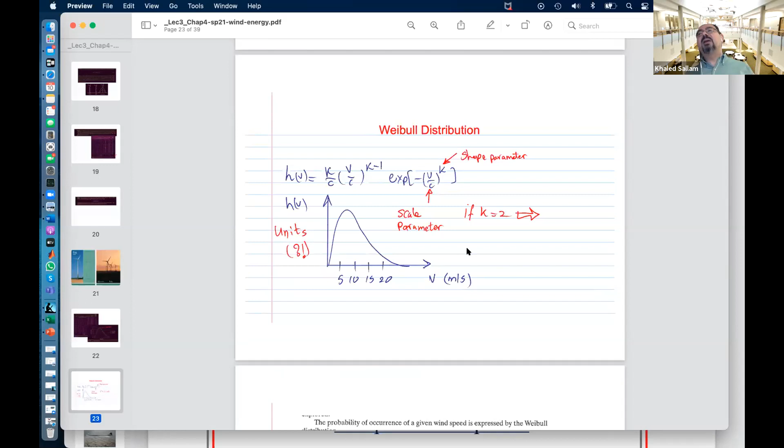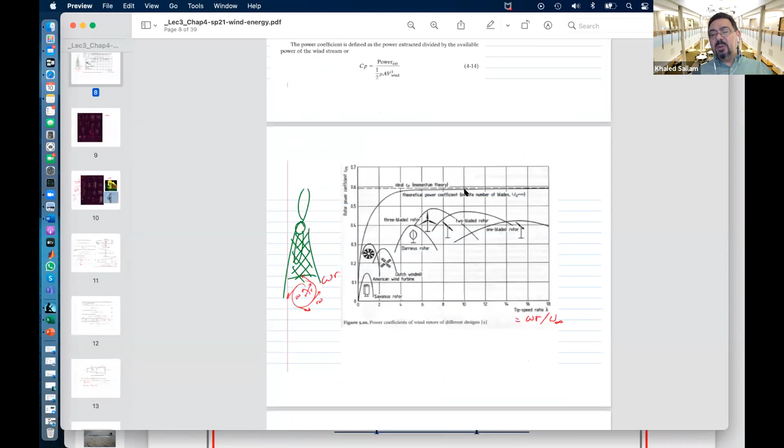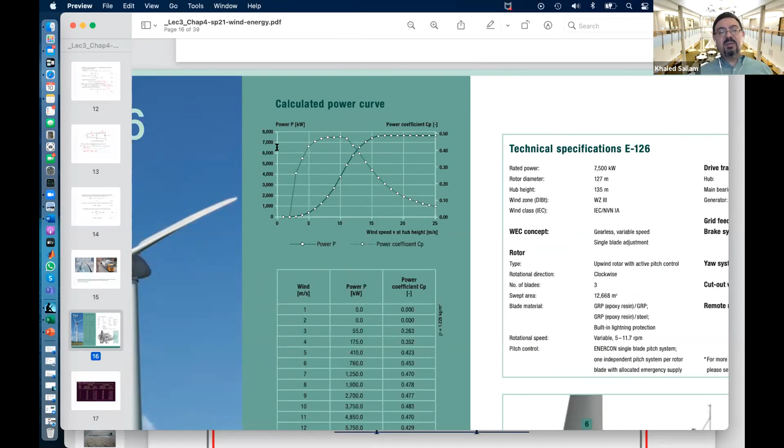But then after that, wind is available, but it's too strong for your generator. You cannot generate more than 7.5 for this guy. And when you go to a smaller model, 300 kilowatt, smaller generator, smaller cable, smaller everything, probably way cheaper turbine, they cannot generate more than 330. So as the winds start to climb up more than 10 meters per second, they start messing up their blades so that CP sucks, but you maintain the rated power. You sold this saying, here's a sticker: this is generating 330 kilowatt, and it costs $100,000. If you want the bigger one, you have to pay more, build a bigger tower, and get bigger blades.

Make sense? So this curve, by the way, is over here in the table. So you just read the wind, and you can figure out what is the power output. You can see how the power output, once you hit the rated speed, it just remains constant after that, until 25, that's the cutout speed, and they wouldn't run after this. You can see how the CP is changing.

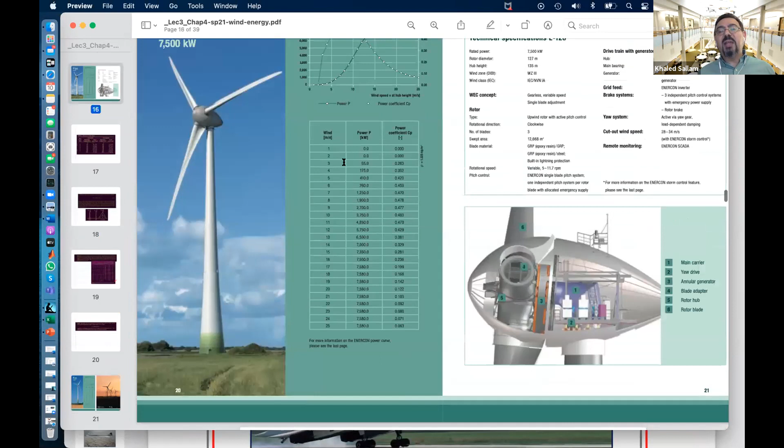Does this make sense? So the problem in something like this depends on you understanding or being able to extract data from this curve. A lot of students get messed up with that CP. Why is the CP not constant, for example? And how did you get this CP? You get it from dividing power output over power input.

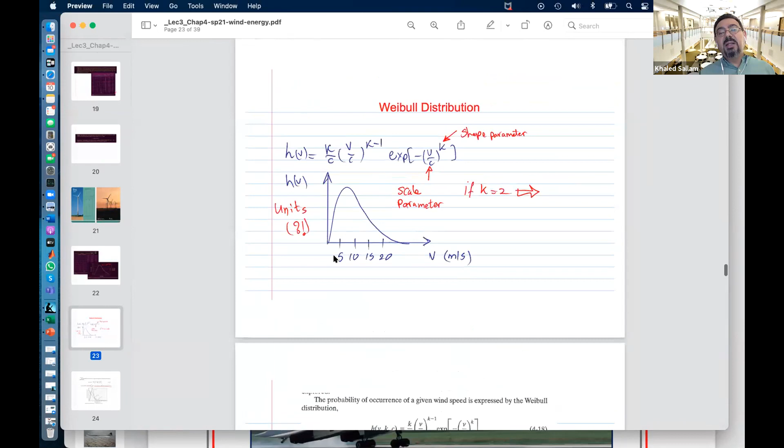Now we don't have time to do this, we'll steal a little bit of time from next week for talking about this, but you need to know that the wind is a distribution. Like when you measure the wind in Tulsa Airport, it's not going to stay at 10 meters per second all the time - it will actually have a big range. Because of this, we need to match the wind speed at the site with the wind characteristic of the turbine. When you put the two of them together, you may find out that your turbine runs at full power only, say, 30% of the time. That sucks. So I'm buying a 7.5 megawatt turbine, and it will never generate 7.5 megawatt except for only 2 months per year. Then I did a really bad matching.

So they need to match. You need a turbine that has a range that consumes, or basically is exactly what you have, or a lot of what you have at the site. Does this make sense? You want a turbine that has a range that matches the site. Otherwise, you have the turbine, but the wind is not there.